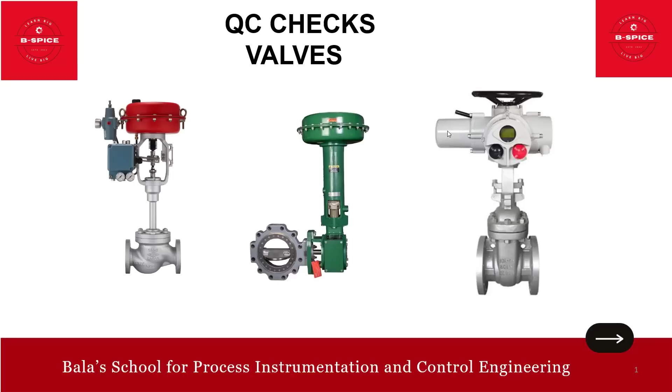Okay, good to go. So allow me to toggle to this different screen. Yes, so this is the look and feel of this sheet. So you can have this heading here, field instrumentation inspection report for field instrument. It's particularly for valves. You can have the logo of your company and the company name you can put in here. And this is the typical format: project name, MOC description, project MOC number, the report number, then location and

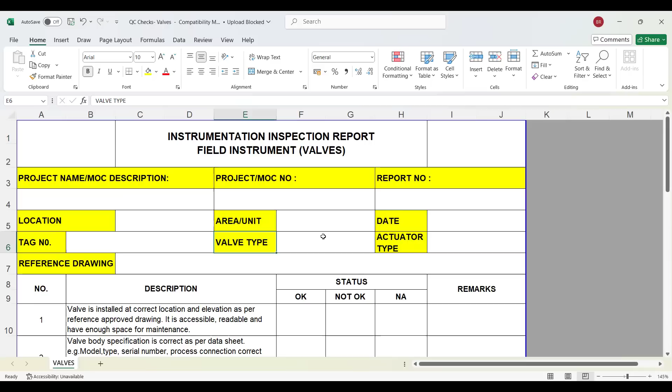area unit, the date, tag number, valve type, whether it is control valve or on-off valve or motorized valve, and of course the actuator, whether it's a motorized actuator or diaphragm type, all these you can fill in. That is a standard for a particular instrument. Okay, now comes the main point.

See, first and foremost, valve is installed at correct location and elevation as per the approved drawing. Meaning, is it accessible, readable, and have enough space for maintenance? So that is the first and foremost we need to watch out for. So you need to have the location drawing, and if it is on the pipeline, you need to have the isometric drawing, all these you need to have in place. So you can use those and check up. So okay means okay, right, friends?

Right. Then valve body specification, meaning as per the data sheet, whether the specification is okay, like model type, serial number, process connection, the flange rating, material dimension, bonnet, fire rated if it is applicable, the color, arrow direction, fail close or fail open, nameplate, all these aspects you need to watch out for. Valve inspection is very, very vital. That is why I put each and every item here.

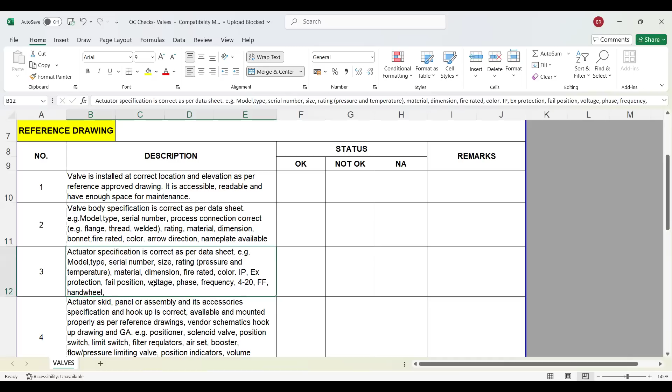Okay, friends? Right. Then the third item, another important item, actuator specification. Is it in line with the data sheet? Again, the model, type, serial number, size, rating, dimension, material, fire rated, color, and IP protection, fail position, and if it is motorized, what is the supply voltage, phase, frequency, all these aspects we need to watch out for.

Okay. Then if you have an actuator skid kind of assembly, then you need to check for this also. Skid, panel, assembly, accessories, hookup, all these, is it in line with the hookup? And then of course the schematic drawing, GA, positioner, solenoid valve, limit switch, air filter regulator, booster if it is applicable, flow pressure limiting valve, indicators, volume booster if it is applicable, manifold, everything in and out. If you are going for this actuator skid kind of assembly, then you need to watch out for all these.

Then, of course, when it comes to the termination, like electrical enclosure, junction box, accessories, all comply with them. Hazardous area classification. If it is zone 2, zone 1, zone 0, it has to be relevant, right?

So if you are having any difficulties in understanding the zone and all, we have uploaded a separate video on this hazardous area classification. You can go and watch and benefit.

Okay. Then valve process tie-in tapping point. Is it correct as per the P&ID? That is very, very important. And also the process connection size and rating is correct or not. Nut, bolts, everything we need to watch out for. Okay. Then the installation orientation and also the flow direction. Sometimes we miss out that. So we need to watch out the arrow and whether it is installed as per the flow direction.

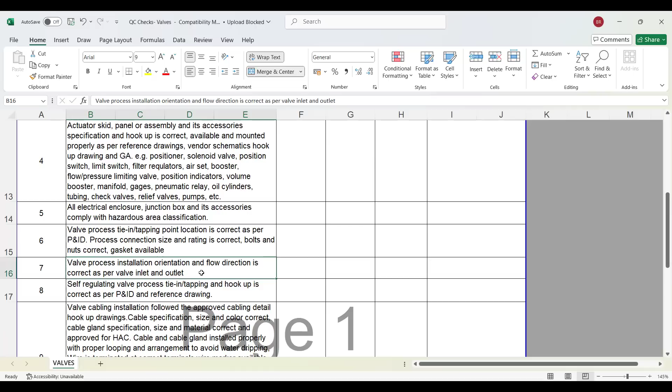Okay. Then self-regulating valve process, tapping, tie-in, all these. See, I have put everything. So the valve in the sense, it is applicable for every type of valve. I cannot go and put one by one, right? So that is why if anything is not applicable, you can simply write it here, not applicable.

Okay. Then comes the accessories. Accessories in the sense cabling, whether the cable is followed as per the approved cable details, cable specification, correct gland specification, sizing, all these are in line with the approval. And of course, the wiring, whether the wire is terminated at correct terminals, the markers are available, crimping is good, shield wire is properly insulated to the enclosure. Example, plug for the spare cable entry also needs to be installed, and also the cable tag for each cable, all these small things also we need to watch out for.

This is all accessories. Then comes the valve instrument assembly. See, if it is a pneumatic valve and a control valve, you have to have all these: supply air pipe, material, isolation valve is correct, whether the tubing is correct, all these we need to watch out for. Then for a hydraulic piping or tubing from remote skid to the valve, we need to check whether the valve is mounted properly and followed as per the approved hookup drawing. Now, this is for the hydraulic piping. If it is applicable, you can use it.

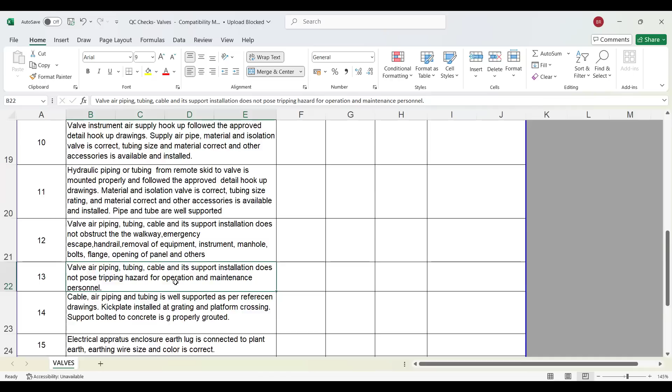Okay. Then we have this electrical apparatus enclosure, earth lug. All these are installed and connected, we have to ensure it. Then we have cable glands, of course. Then what else? Whether the accessory panel is free from paint, dirt, damage, water ingress, dust, rubbish, rust, etc. These are all the external things. Then finally, we can also have a look at whether the weld points or painting are correct.

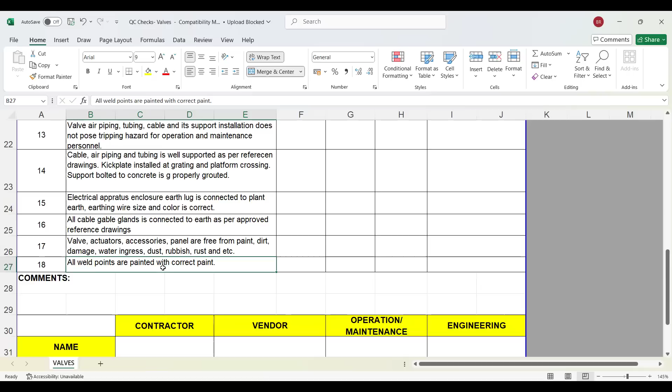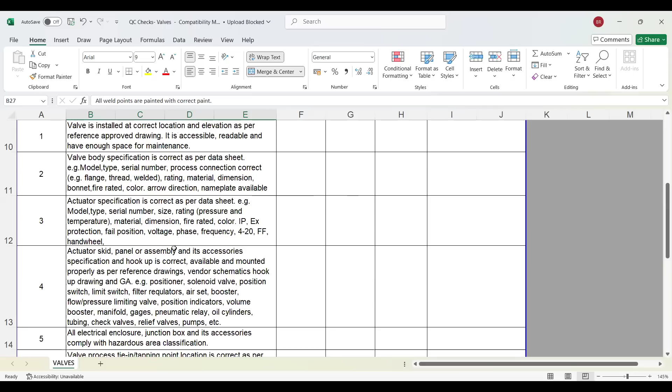Okay, friends? So these are some of the points that came to my mind. If anything, you can add from your side. So this is good enough for going for an inspection for the valves. I didn't spell out each and every item, but of course you can make out from this Excel sheet. So again, sign off: contractor, vendor, operation and maintenance, and engineering.

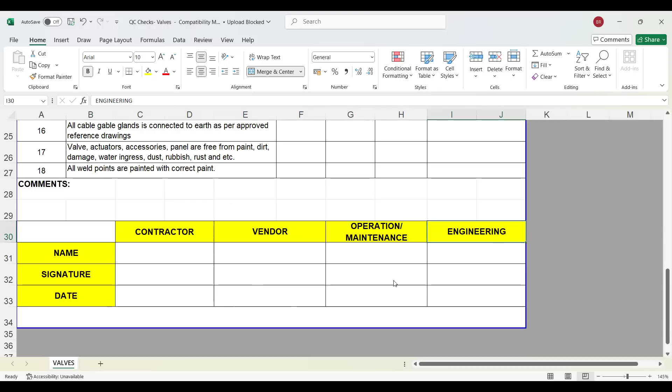What is that? Yeah, panel. We can talk about the cabinets. We are already done with the field instrument. Valves also done, and system side also done. We'll talk about the system cabinets.